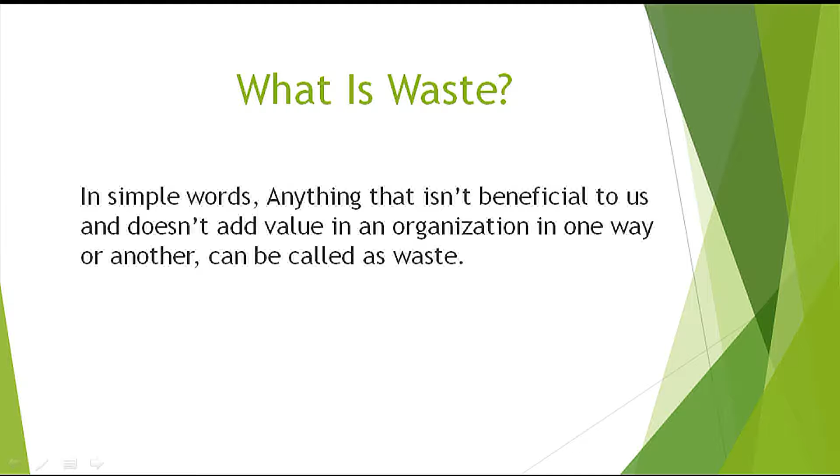What is waste? The simplest way to describe waste is something that adds no value. There are 7 types of waste, which you can see here. The easiest way to remember them is the name TIM WOOD.

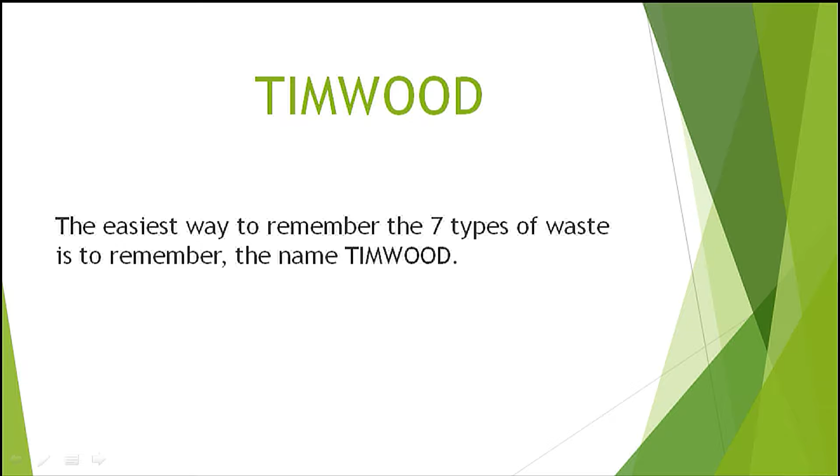First, the waste of transport. Transport is the movement of materials from one location to another. This is a waste as it adds zero value to the product. You as a business are paying people to move material from one location to another, a process that only costs you money and makes nothing for you. The waste of transport can be very high.

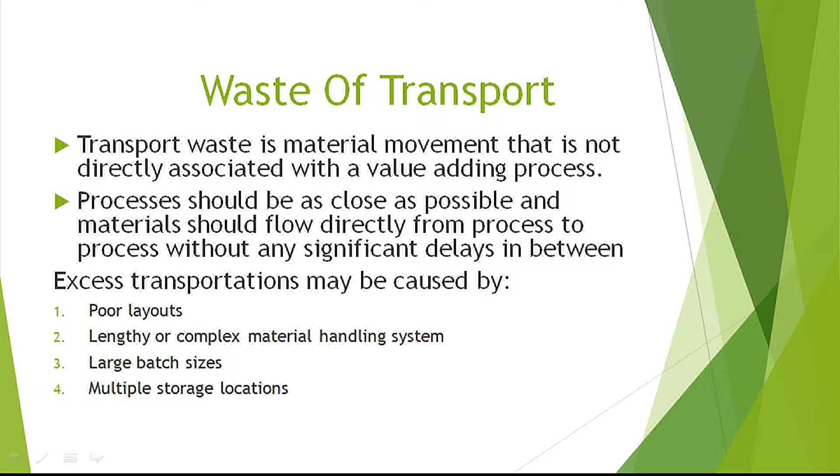Then the waste of inventory. Inventory costs you money. Every piece of product tied up in raw material, work in progress, or finished goods has a cost, and until it is actually sold, that cost is yours. In addition to the pure cost of your inventory, it adds many other costs. Inventory feeds many other wastes. It has to be stored, it needs space, it needs packaging, and it has to be transported around. It has the chance of being damaged during transport and becoming obsolete. The waste of inventory hides many other wastes in your systems.

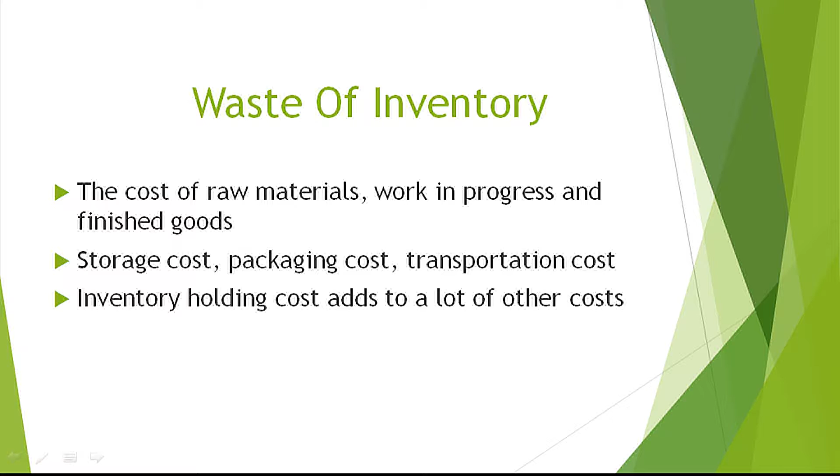Then the waste of motion. Excessive motion of either people or machines is a waste. Unnecessary motions are those movements of man or machine which are not as small or as easy to achieve as possible. By this, I mean bending down to retrieve heavy objects at floor level when they could be fed at waist level to reduce stress and time to retrieve. Excessive travel between workstations, excessive machine movements from start point to work start point, are all examples of the waste of motion. All of these wasteful motions cost you time and money. They also cause stress on your employees and machines. As we all know, machines wear out.

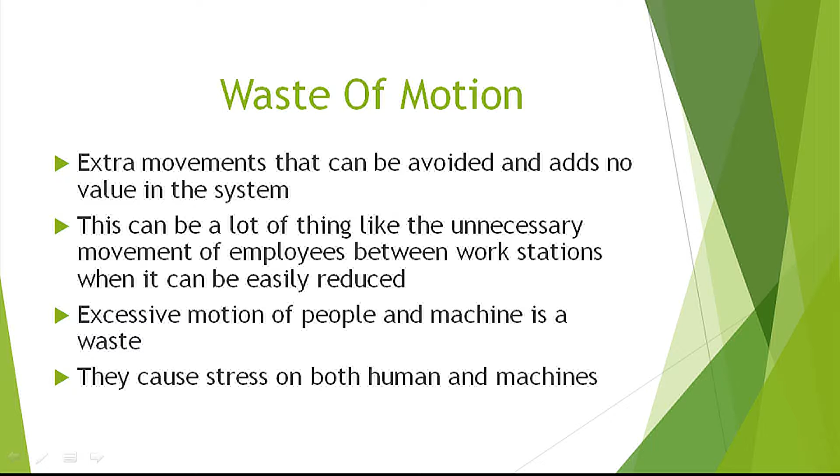Then the waste of waiting. It is actually the waiting line. We discussed earlier about the waiting line problem. The waste of waiting disrupts the flow of the manufacturing process.

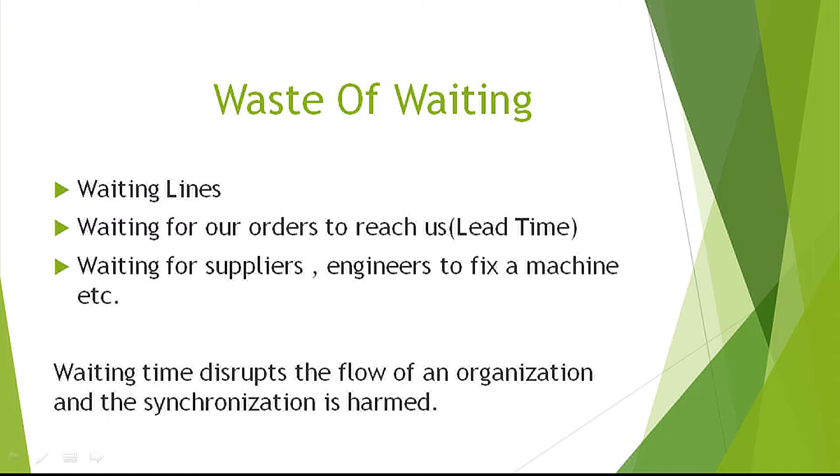Then the waste of overproduction. Overproduction can be the most deadly of all the 7 wastes. The waste of overproduction is making too much or too early. This is usually because of working with oversized batches, long lead times, poor supplier relations, and a host of other reasons. Overproduction leads to high levels of inventory, which masks many of the problems within your organization. The aim of the company should be to make only what is required, when it is required, by the customer.

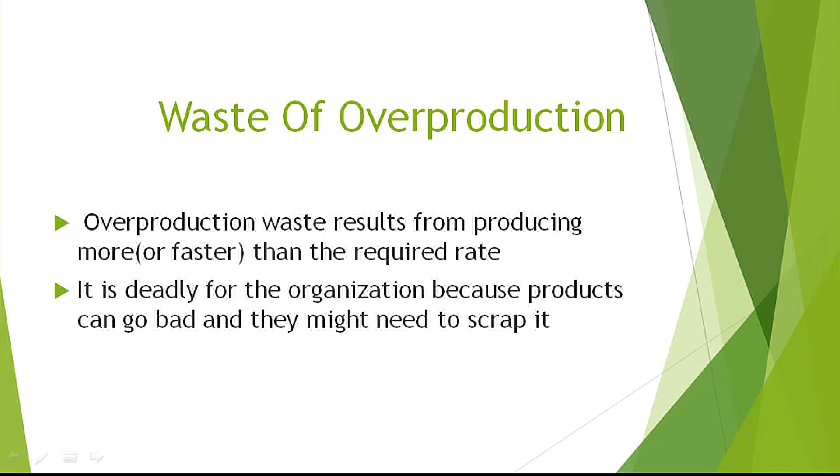Then the waste of overprocessing. The waste of overprocessing is where inappropriate technique, oversized equipment, working to tolerances that are too tight, or performing processes not required by the customer, and so forth, all cost us time and money. One of the biggest examples of overprocessing in most companies is the use of monument machines. This type of machine can do an operation faster than any other, but every process flow has to be routed through it, causing scheduling complications, delays, and so forth.

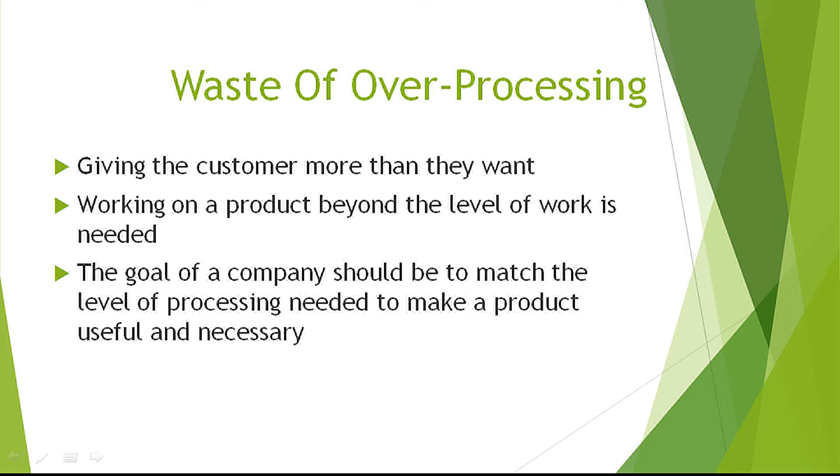Lastly, the waste of defects. This is the most obvious of the 7 wastes. It is not always easy to detect defects before the products reach the customers. Quality errors that cause defects invariably cost you far more than you expect. Every defective item requires rework or replacement. It wastes resources and materials, it creates paperwork, and it can lead to lost customers. The waste of defects should be prevented where possible - better to prevent than to try to detect them.

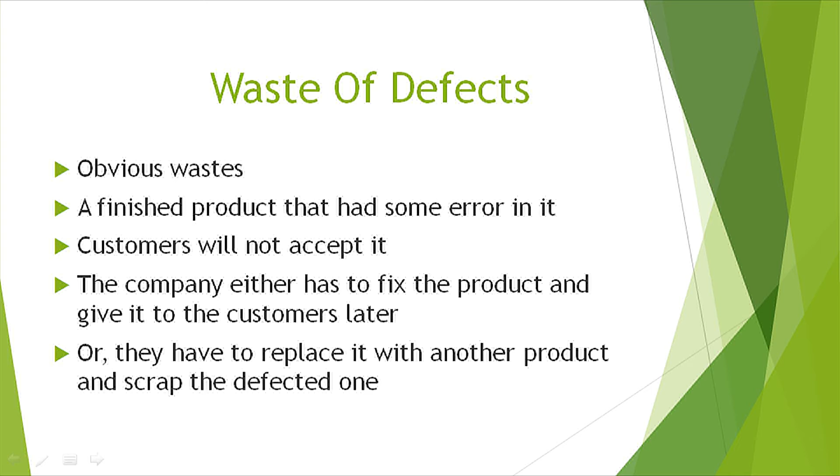Then there are some other additional wastes. Firstly, waste of talent. Failing to make use of people within your organization is a waste of talent. This is an issue that many companies fail to address. We still tend to operate within a command and control environment and take little real notice of what our employees really think and what they can contribute. Your employees are your greatest asset by far and can help you drive out many of the other wastes.

Then there is also the waste of resources. The failure to make efficient use of electricity, gas, and water can be a waste of resource. Not only does this waste cost you money, it is also a burden on our environment and society as a whole.